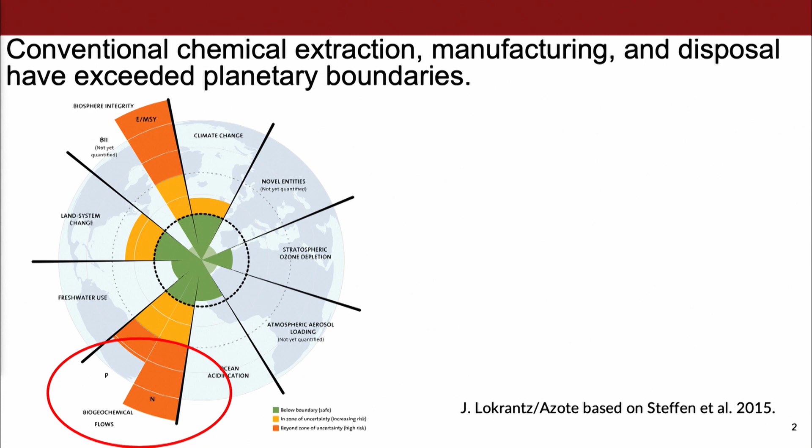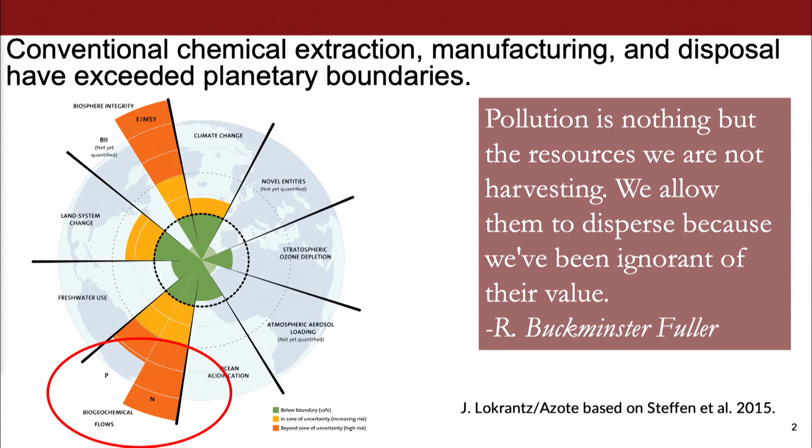One of the quotes I like to think about is a pretty old quote from R. Buckminster Fuller, and he's really talking about how we call something a pollutant when it's in the wrong place or the wrong time, wrong in quotes here. But the same compounds, nitrogen and phosphorus, that are pollutants in waste streams are actually some of the building blocks of not just biology, but our industrial economy, right?

Nitrogen fertilizers feed about half the world, but when they're fertilizers, we call them a product, a commodity chemical. When they're in our water streams, we call them a pollutant. So if we can resituate them, we can start to achieve the circular economy and start to translate some of these technologies. So to focus on nitrogen a little bit, we can think about the nitrogen cycle, broadly speaking.

The natural nitrogen cycle is well balanced between dinitrogen, inert nitrogen gas, and reactive nitrogen, kind of all the other forms. Ammonia and nitrate, these first two tend to be in water, and the others tend to be in the atmosphere. So humans, we've done two things to the nitrogen cycle. We've skewed it towards reactive nitrogen, so there's much more reactive nitrogen in the environment. And we've kind of doubled the throughput of nitrogen that goes through the environment.

And so the biggest contributors to this are arguably my own field of chemical engineers who invented the Haber-Bosch process. This, of course, in the 21st century, is a real challenge, but it was developed to feed the world, basically. And we need to think about now how to sustain the world. Now, this isn't matched in magnitude by nutrient removal from wastewater treatment plants, and so this is the source of this net linear discharge of nitrogen into the environment.

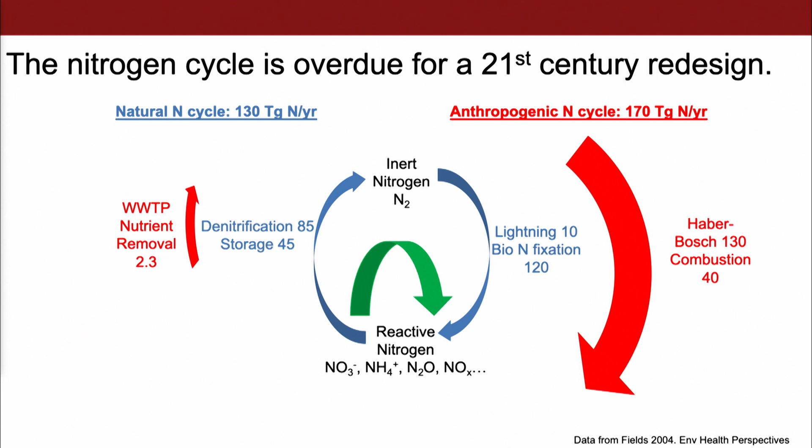And so environmentally, what we're doing is feeding over 100 megatons of nitrogen into the global aquatic ecosystem. And as we make fertilizer, we also expend millions of tons of CO2 as well.

What this also means is that we're all paying the cost of emissions associated with transport, right? So the fertilizer has to get taken from these fewer than 100 centralized facilities and taken all over the globe. So we're all paying that externality of greenhouse gas emissions associated with transport. So how can we think about this? Maybe not the first thing to many people, but the first thing in my mind is wastewater. How can wastewater play a role here?

So one of the ways to think about this is if we look at all the mass of nitrogen that is made via Haber-Bosch nitrogen production, and think about all the nitrogen in wastewater. And for convenience, let's just talk about two types of wastewater: fertilizer runoff from agricultural fields, and municipal wastewater, when you flush the toilet and it goes to whatever treatment plant is closest to you, like I showed on the first slide. If you divide that wastewater nitrogen by how much nitrogen we use, you get around 30%. So that's our envelope of what we could address by capturing nitrogen from wastewater, around 30% of fertilizer production.

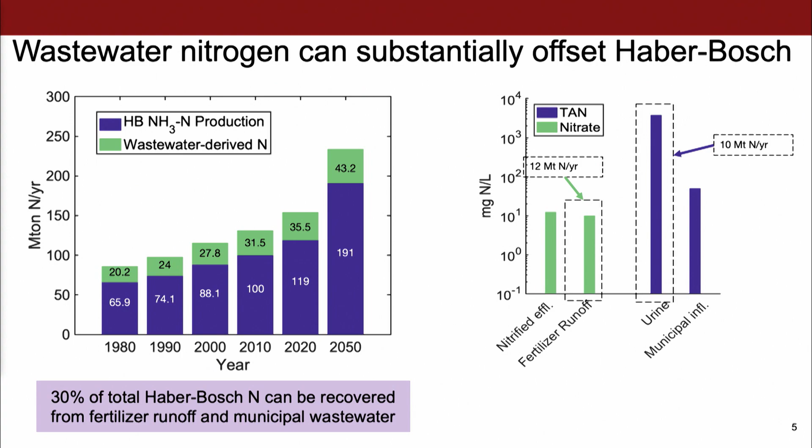Now, you could also think about what form of nitrogen should we focus on. I talked about ammonia and nitrate. And so you might say, should I focus on ammonia, should I focus on nitrate? And my answer to that is both, or yes, because they have similar mass magnitudes in terms of what's available in the environment. So whether you want to take nitrate and turn it into something valuable, or take ammonia and turn it into something valuable, both are potentially profitable endeavors.

So one of the things we try to think about is wastewater is this huge category. Most of us think of wastewater as what happens at the municipal wastewater treatment plant, or you might just think about your toilet at home. But there's so many different types of wastewater that we can represent as these different pie charts. And I'll suffice it to say that there are at least 4 facts that are important about a given wastewater. And remember, each wastewater here is one of these pies.

So we can think about its global flow rate, how much of that wastewater there is, and how many dissolved solids are in it on the y-axis, where the global flow rate was on the x-axis. We can think about the size of these pies, so to speak. That's the dollar value of what's present in that wastewater. So the bigger the pie, the bigger the monetary opportunity. And then we can think about all the different elements that are in it.

So a lot of times when we think about wastewater, the first thing that comes to mind that you can recover is water, drinkable water. And of course, that's true. And there's much more on the table in wastewater besides just the water, right? And so that's what we're trying to drive home here. There's plenty of commodity chemicals that we can manufacture from wastewater.

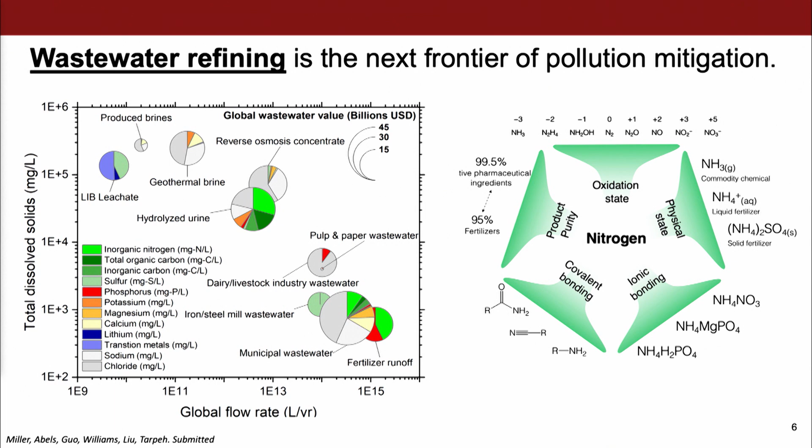So just thinking about nitrogen, some of the ways that we can think about modulating what's happening here, we can think about changing oxidation states between nitrate and ammonia, changing the physical state. Are we doing a solid, a liquid, a gas? Changing the chemical formulation, and also changing the product purity.

So the ways that we think about this are trying to develop refineries, and we sort of take back that term from oil and gas on purpose here, but in a way that we're saying refining means taking a raw stream like wastewater, or oil and gas would say like crude oil, and then being able to produce dozens of products from it on site, right? And tailor these different processes to make, frankly, whatever we want.

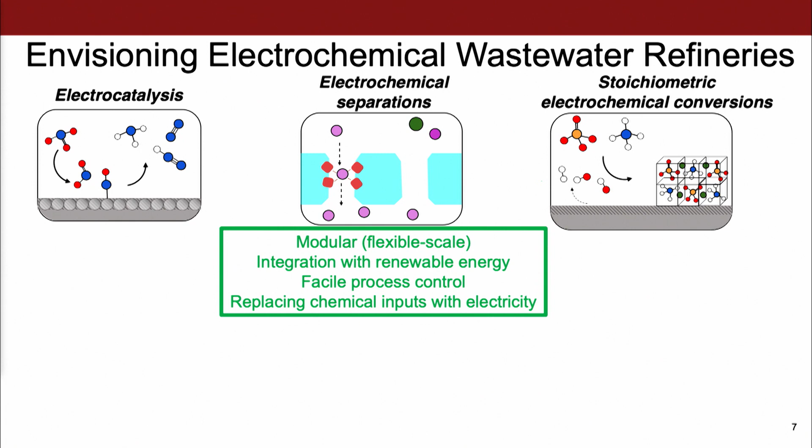And so we're using electricity here because it can be flexible scale, it's easily integrated with renewable energy, think photovoltaics on site. We can achieve process control, and maybe most importantly, we can replace chemical inputs with electricity. So instead of trucking acid and base all over the world, we can produce acid and base on site just using renewable electricity. And that's what we're after here in terms of point-of-generation wastewater and delivering commodity chemicals where they're needed.

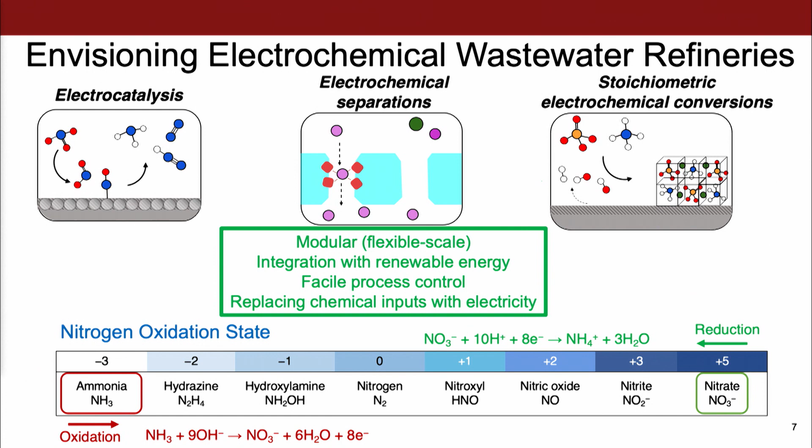And so again, these are some different forms of nitrogen that we can use and do these reactions to make different forms anywhere you want to stop along this oxidation state ladder. So in terms of what my group does, we can divide it into kind of 3 areas. These electrochemical processes that I described, these selective materials that might help us get just one element out of wastewater.

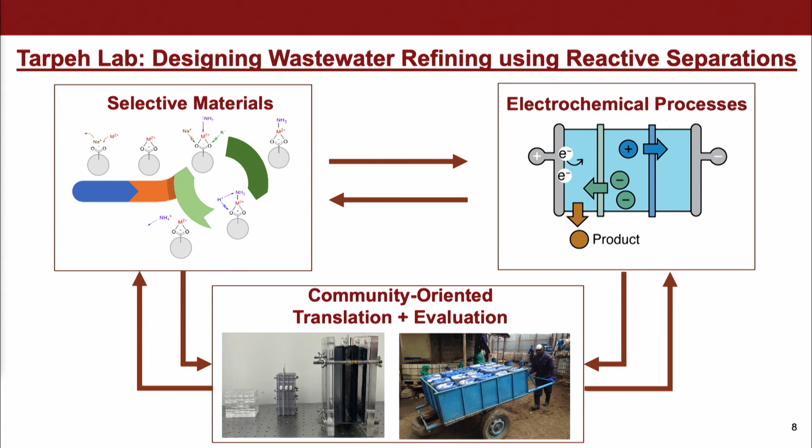So nitrogen is the focus today, but you can also think about something like lithium-ion battery recycling, where we want to get just the lithium out of batteries that we're trying to recycle so that we can make new batteries. But that's kind of a needle in a haystack problem, and that's what we're after. And then a large part of the group is also focused on actually translating some of these results out into the world and trying to design actual technologies that people can use. So I'll give you just a kind of quick insight into a couple of these.

So from the electrochemistry standpoint, one of the core things we do is use charge and volatility, which are 2 properties of nitrogen, to separate it selectively from really any wastewater that contains nitrogen. So how we do that is we basically hook up 2 different electrodes, metallic electrodes, and some ammonium-rich wastewater comes in. We have salt and acid in these other chambers, and so this is a reactor that you can hold in your hands. And so we're doing a reaction here, oxygen evolution, where we're acidifying the wastewater that comes in. And so ammonium becomes our major version, NH4+.

That is charged, of course, and can be attracted to that negative electrode, cross a selective membrane, and at that negative electrode, will basify, increase the pH, and turn that ammonium into ammonia, simply by deprotonating it. So here we've separated ammonia based on charge, just a positively charged species. That's not enough because, as you can imagine, there are other positively charged species in wastewater, sodium, potassium ions, et cetera. So we need another selectivity filter here.

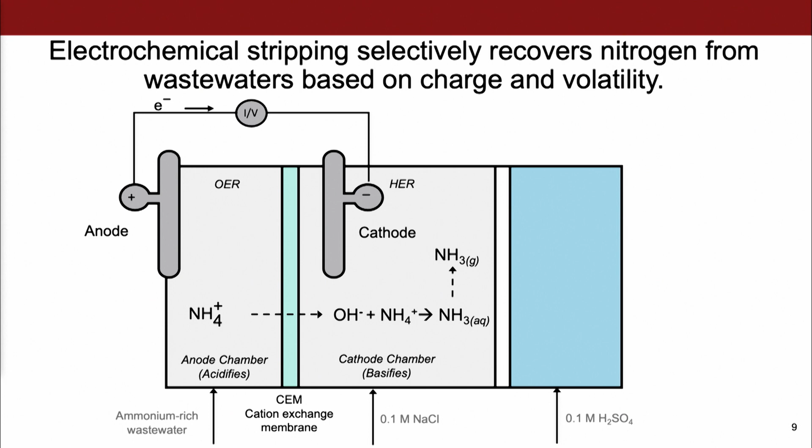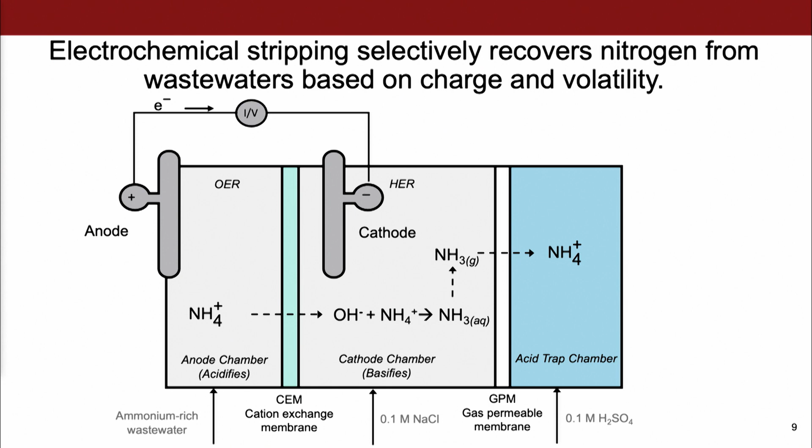And what we use is the fact that we can make ammonia into a gas. So now we select for the fact that we happen to make a gas by increasing pH. And then we can capture that gas across a membrane that doesn't let liquid through but does let gas through. So what we've done is separate ammonia on its own by virtue of its charge and volatility. So what does this look like in practice? It means that this is treating real hydrolyzed urine.

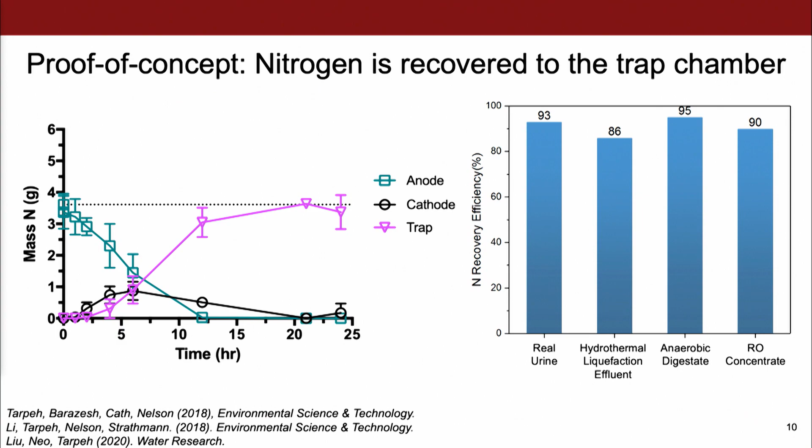This means that we can turn all of the nitrogen that was in the anode feed chamber into nitrogen that's in the trap chamber. I said we could do this for multiple wastewaters. What I mean by that is that we designed this for real urine, but we can take really any ammonia-rich wastewater and do this at high efficiency. And these efficiencies are how much ammonia you get in the product versus how much was in the feed wastewater. So as you can imagine, there's a lot of engineering that has to happen to be able to do this for all these different wastewaters. And so, like I said, we're trying to translate this out of lab.

And so several of my students, Anna and Kindle in particular, and this is in partnership with the Sustainability Accelerator, are trying to do long-term testing, so run these techniques for months rather than just days, the data I just showed you. We're doing some collaborative work with practitioners in both Senegal and Kenya with a focus on decreasing the cost of sanitation, of toilet access, by providing value from them.

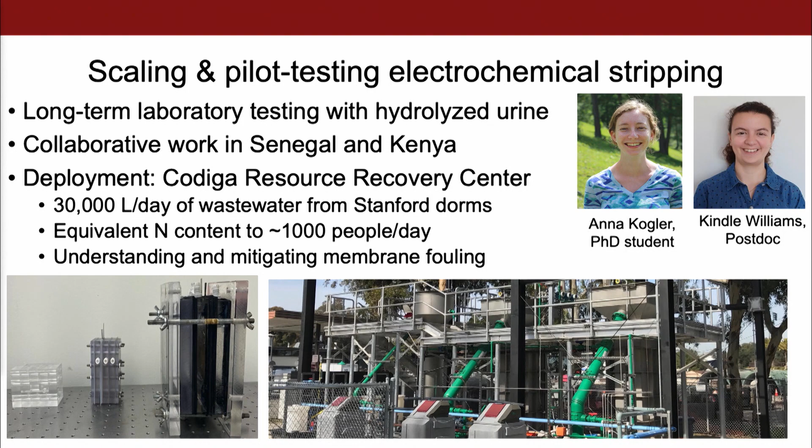And then, of course, we're partnering with the Codiga Resource Recovery Center here on campus to try to get out of the lab at something like 10 liters a day to something more like 30,000 liters a day, which is a fun chemical engineering scaling problem, but one that we're hoping we're up to, and trying to understand some of the really practical challenges, like how long do your membranes and electrodes last and things like that.

So another application of this work also is miniaturizing, rather than making it bigger, to actually make small-scale sensors to sense nutrients as they go throughout the environment. And so this is collaborative work with Kate Maher and Debbie Senesky. We've 3D printed a smaller version of this, so this part could fit in like a few of my fingers.

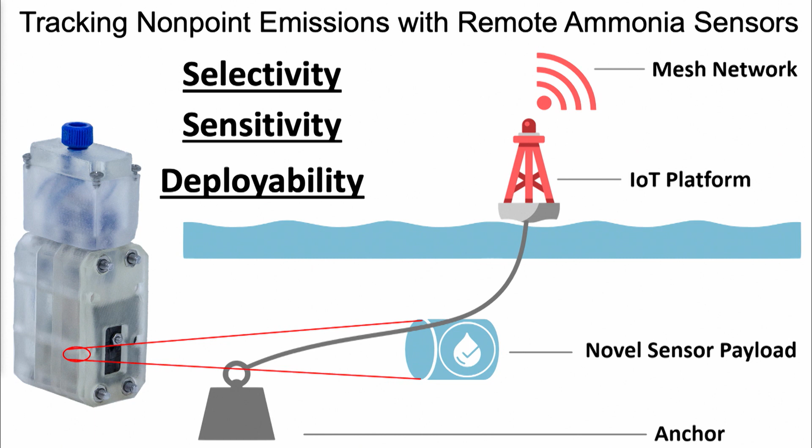And so the idea here is that we can combine the selectivity of the approach I just showed you with the sensitivity of some different electrodes that Debbie has developed and make deployable sensors that really sit in fresh waters, for example, or coastal waters, and tell us when there's a plume of nitrogen coming so that we can attempt to remediate it.

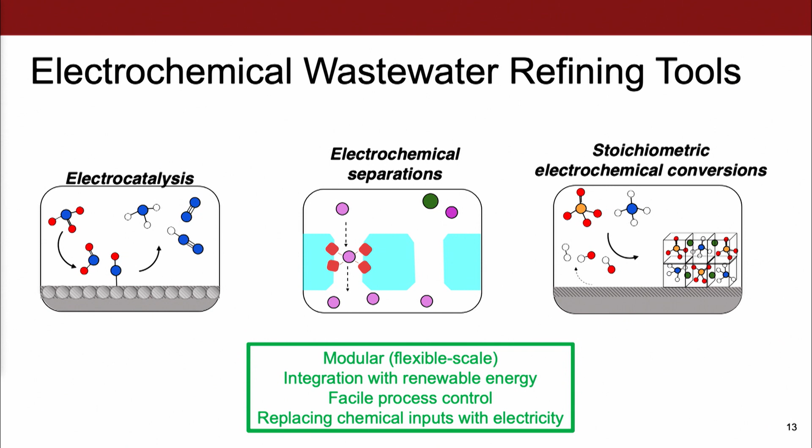The last thing I wanted to do is just give you a little thought about how we design these electrochemical separations as well. And so in short, the main things that we think about when we try to design an adsorbent, and you can just think about this as like the inside of a Brita filter, but selective, right? So rather than just removing all the contaminants from your drinking water, we want to get just one out at a time. So you might think about the capacity, how much of the pollutant you can get out, the selectivity, which pollutant you can get versus another, and then the regenerability.

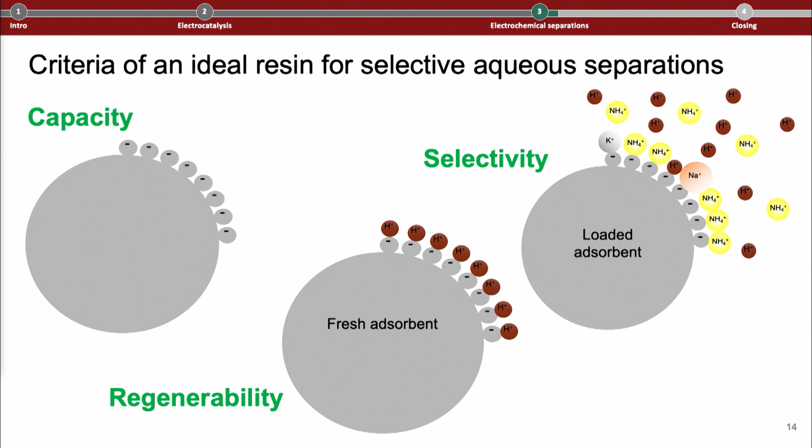So I'll end with just a few of the other aspects of what's going on so that you don't just think I only think about nitrogen, although I do spend a lot of time thinking about nitrogen. Some of the other things we do are looking at producing actual valuable chemicals from desalination brine, which I consider a wastewater of wastewater, so to speak.

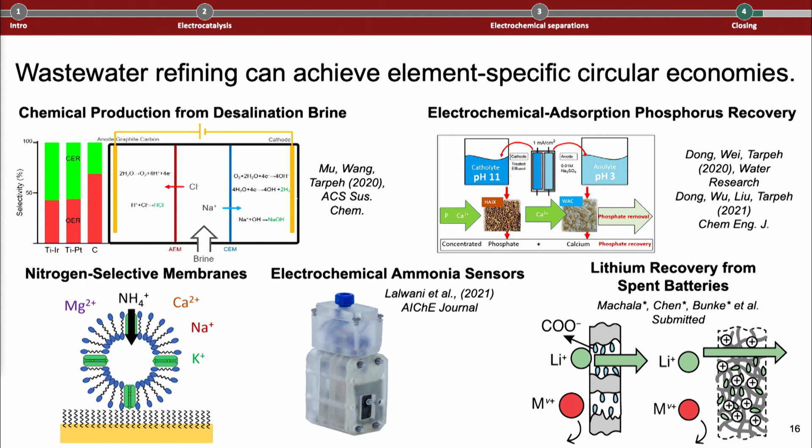So kind of a dirty secret of desalination is that you often produce almost as much or as much salty water as you do clean water, and we need to do something with that salty water. If you're near the ocean, ostensibly, people are okay with discharging it. But if you're inland, that makes desalination a non-starter. Also thinking about phosphorus recovery, I mentioned lithium recovery from spent batteries, and some biological work on nitrogen selective membranes.